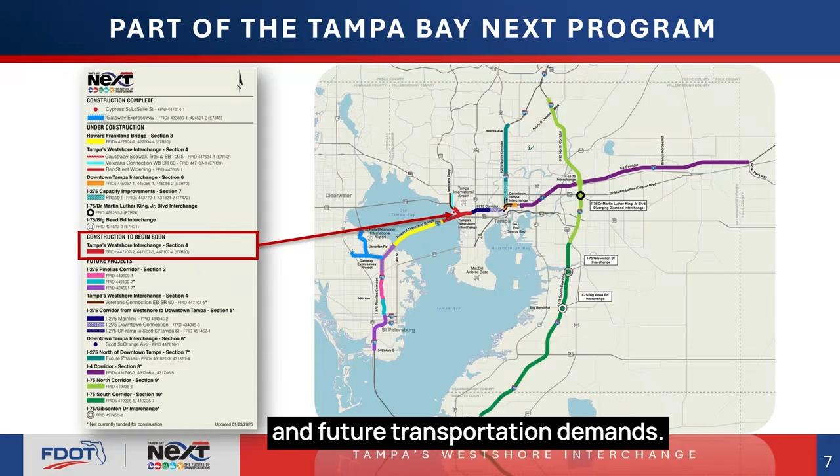Slide 7. Tampa Bay Next, or TB Next, is FDOT's long-term transportation program designed to modernize the region's interstate system. It focuses on improving safety, travel time through the corridor, and connectivity across the Tampa Bay area by addressing critical infrastructure needs on I-275, I-4, I-75, and I-175/375. The program is organized into major initiatives such as interchange reconstructions, express lanes, transit integration, stormwater upgrades, and pedestrian/bicycle facilities. Rather than treating each project in isolation, TB Next provides a coordinated framework so that improvements work together to meet the area's current and future transportation demands. The TWI project we are discussing today is part of the TB Next program.

Slide 8. In January, construction officially began on the Tampa Westshore Interchange project, Florida's first-ever phased design-build transportation project. Phase 1 establishes the foundation for long-term improvements along one of the region's busiest corridors. This phase includes widening and modernizing Interstate 275 and State Road 60, adding new express lanes and flyover connections, and improving access to Tampa International Airport.

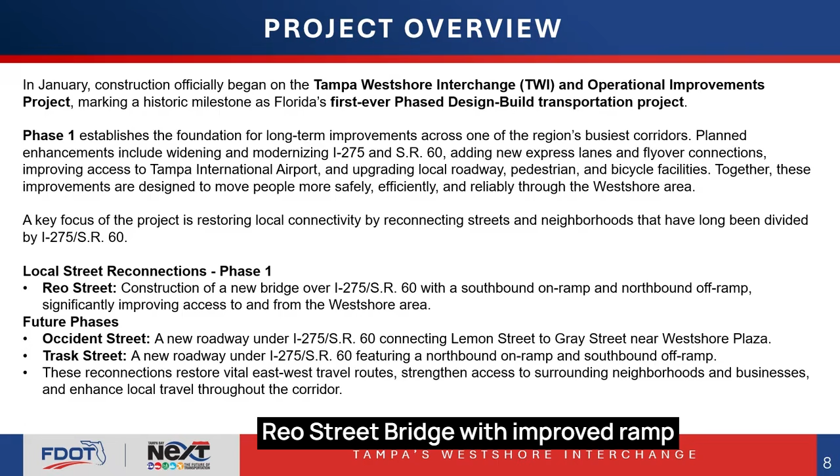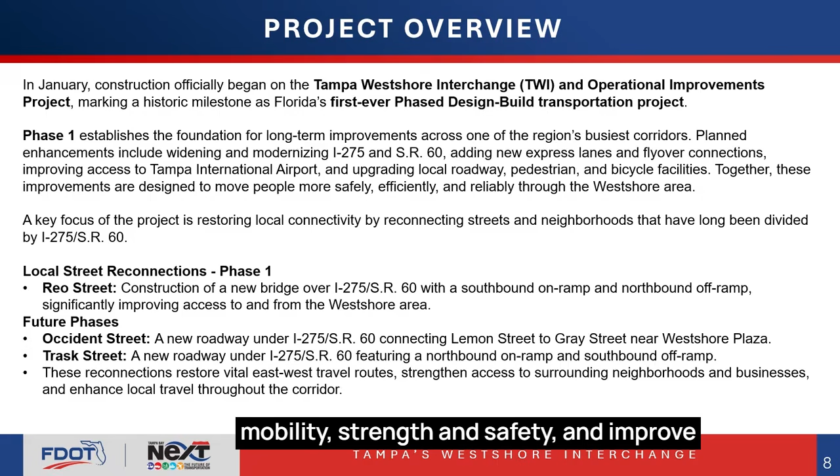The project also enhances local roadways, as well as pedestrian and bicycle facilities, creating a safer and more complete transportation network. A major focus of the project is restoring local connectivity by reconnecting streets that have long been divided by Interstate 275 and State Road 60. This includes construction of a new Reo Street Bridge with improved ramp access as part of Phase 1, along with future connections planned at Occident Street and Trask Street. Together, these improvements will enhance mobility, strengthen safety, and improve access for surrounding neighborhoods and businesses throughout the Westshore area.

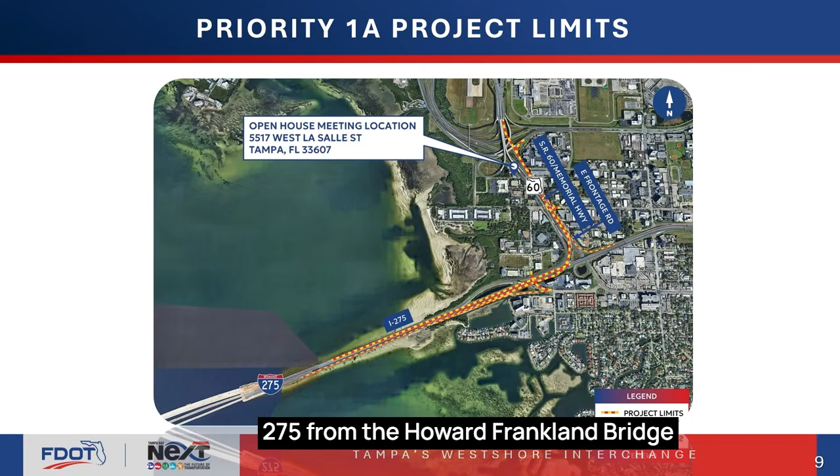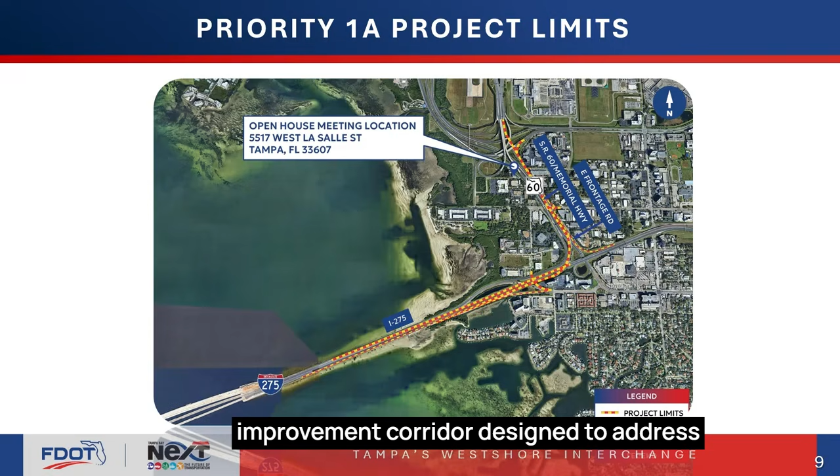Slide 9. The project limits extend along Interstate 275 from the Howard Frankland Bridge eastward to just beyond Lois Avenue, from south of Tampa International Airport north to Kennedy Boulevard. Enhancements are planned along Cypress Street, Kennedy Boulevard, and Reo Street, with several targeted work zones throughout the project area. Together, these limits define a comprehensive improvement corridor designed to address regional travel while enhancing local connectivity within the Westshore District.

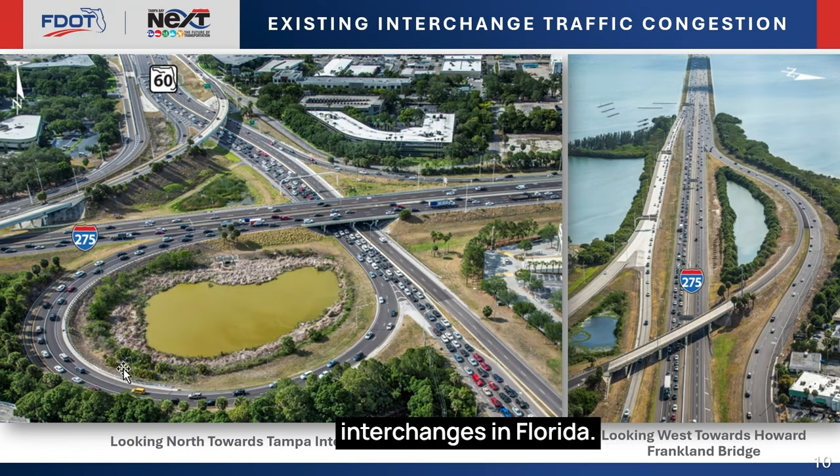Slide 10. Before we look at the proposed improvements, it's important to understand the current configuration of the Westshore Interchange. This area is one of the busiest interchanges in Florida. Every single day, more than 400,000 vehicles move between Interstate 275, State Road 60, the Veterans Expressway, and Tampa International Airport. Commuters, freight trucks, and airport traffic all converge in this interchange.

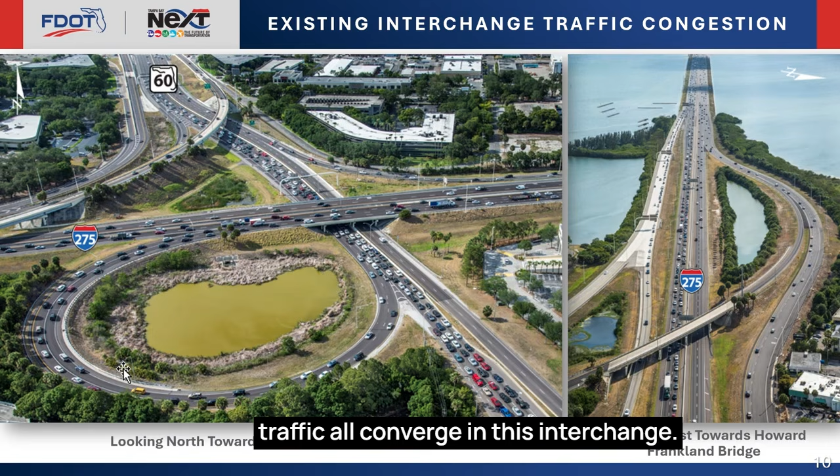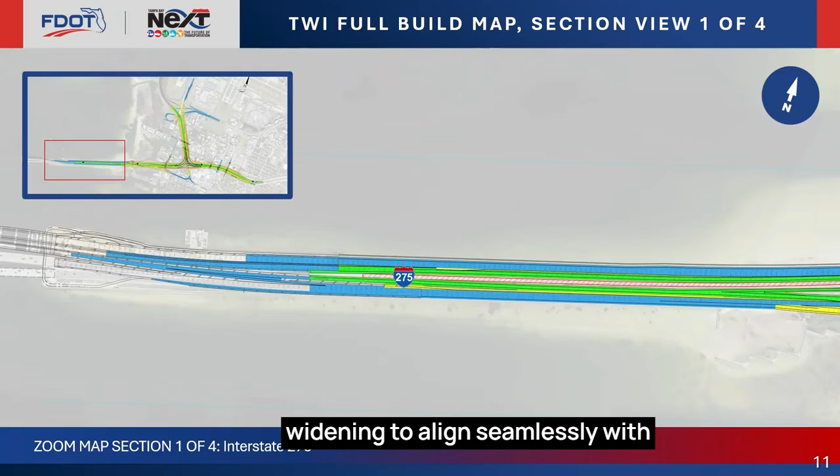Slide 11. Let's look at the future full build out of the TWI project. This section is the westernmost portion of the TWI project, where I-275 connects to the newly reconstructed Howard Frankland Bridge. As part of the project, this segment will see major improvements to I-275, including reconstruction and widening to align seamlessly with the new Howard Frankland Bridge, new lanes and ramp connections designed to improve capacity and reduce congestion approaching the bridge, upgraded shoulders and safety features, preparing the corridor for future express lanes.

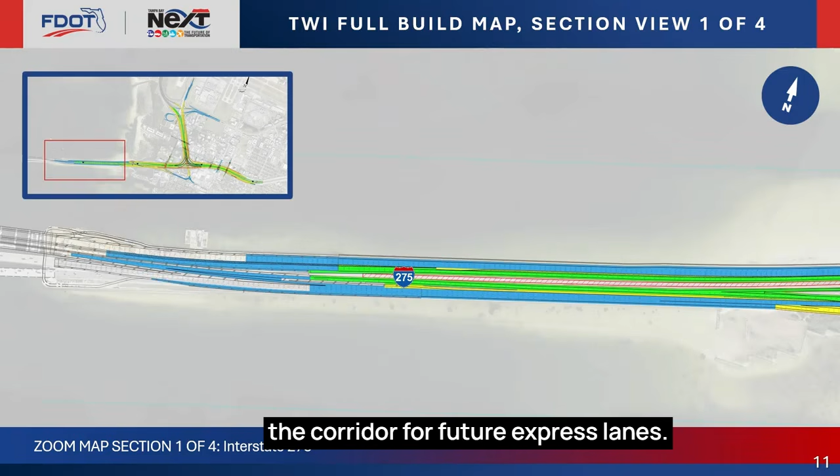These upgrades ensure that traffic flows smoothly and safely between the Howard Frankland Bridge and the Westshore Interchange, creating a stronger, more reliable regional connection across Tampa Bay.

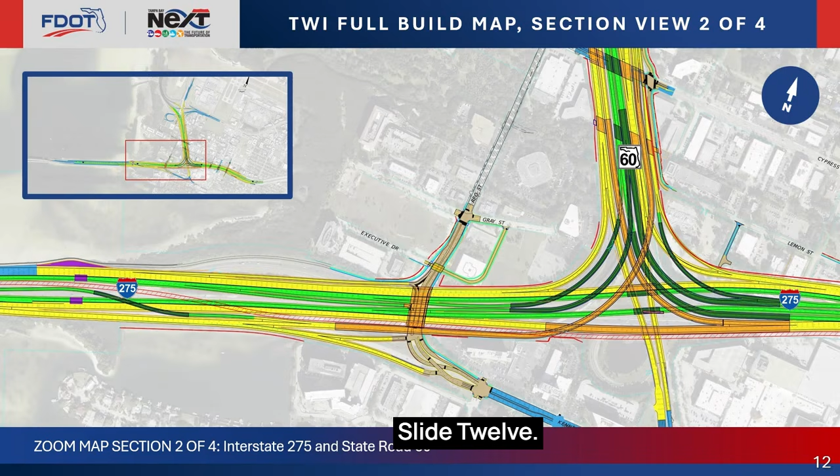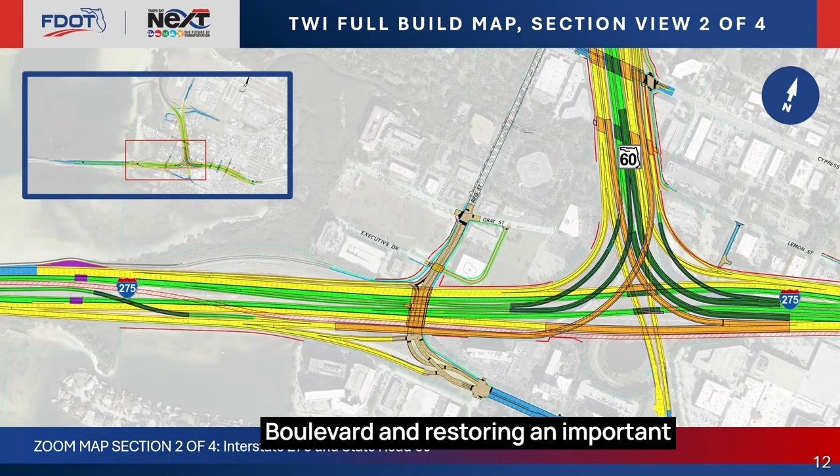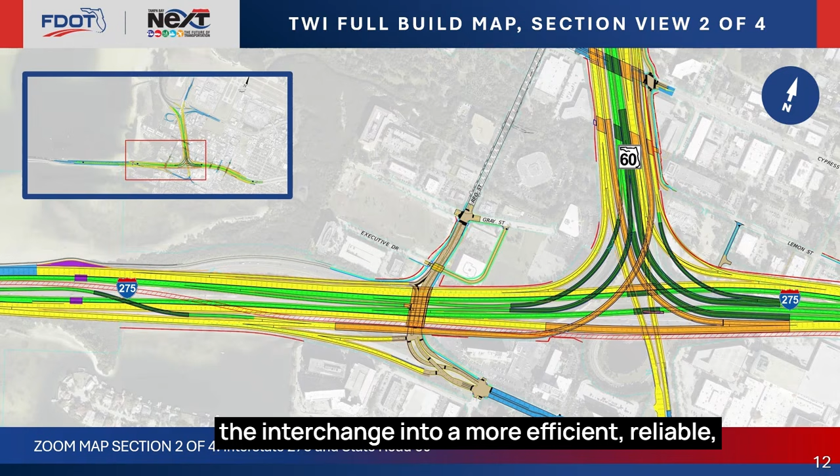Slide 12. The ultimate design reconfigures the I-275 and SR-60 interchange to improve traffic flow, capacity, and safety. A new Reo Street Bridge will cross over I-275, reconnecting to Kennedy Boulevard and restoring an important east-west route for local traffic. New flyover ramps will provide more direct connections between I-275, SR-60, and Tampa International Airport, reducing lane changes and weaving. Upgraded drainage, lighting, and landscaping will further enhance safety and the overall appearance of the corridor. Together, these improvements will transform the interchange into a more efficient, reliable, and safer transportation hub for the region.

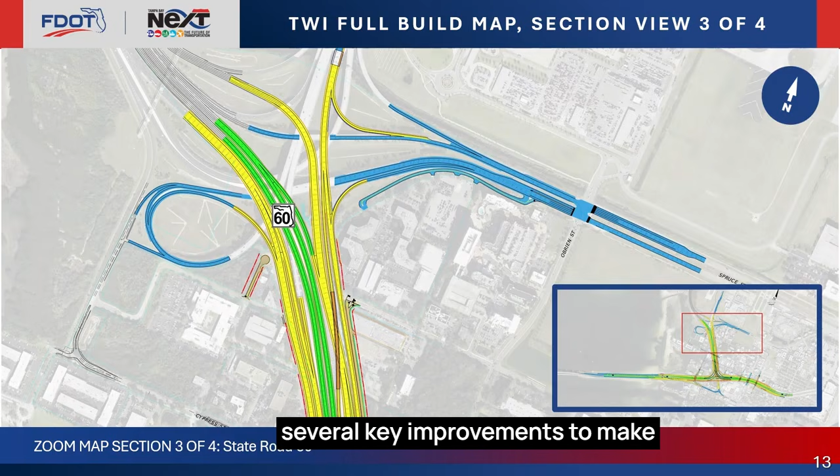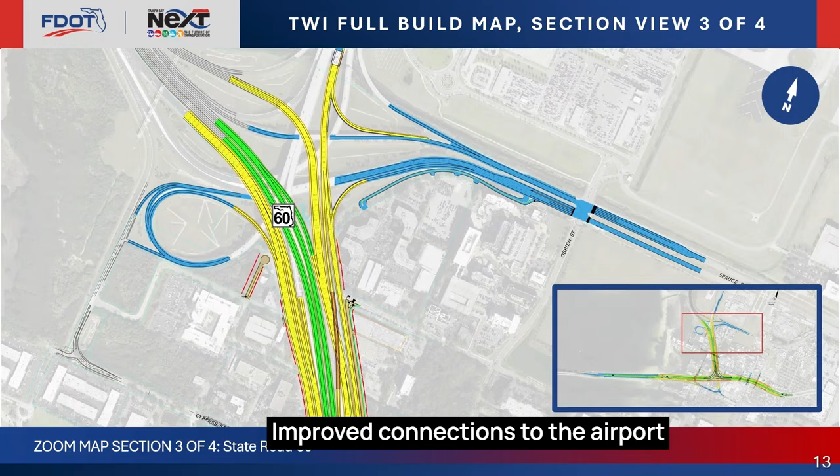Slide 13. This area here is where SR-60 connects directly into Tampa International Airport. The future configuration introduces several key improvements to make this section operate more efficiently. New, longer ramps and auxiliary lanes will help separate airport traffic from through traffic on SR-60, reducing congestion and weaving. Improved connections to the airport entrance roads will also make it easier and safer for travelers to reach the terminals.

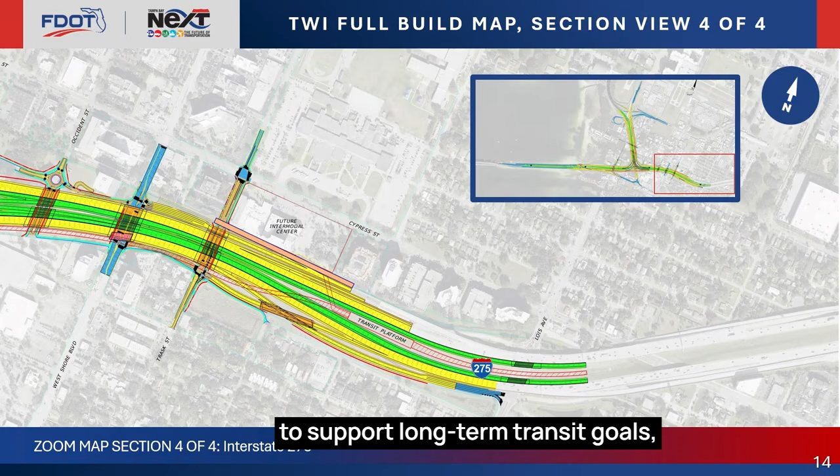Slide 14. This final section highlights I-275 near Cypress Street, a critical link between the Westshore Business District and the greater Tampa Bay region. The ultimate configuration includes new connections at Occident and Trask Streets to reconnect surrounding neighborhoods, space for a future intermodal center to support long-term transit goals, and enhanced pedestrian and bicycle links to the shared-use path network. Together, these improvements will help transform I-275 into a safer, more connected corridor that supports local travel and future regional growth.

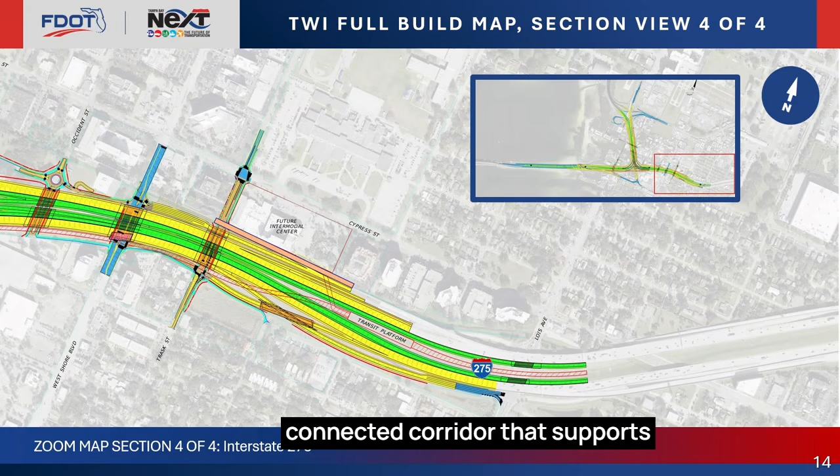Slide 15. Here we're looking at the section where SR 60 meets I-275, a critical gateway for drivers heading to and from the airport, downtown Tampa, and the Veterans Expressway. Today's interchange is a central pinch point. The ramps are short and closely spaced, and drivers from SR 60 often must weave across multiple lanes to reach I-275 north or south.

That constant lane changing creates slowdowns, backups, and a potential for crashes.

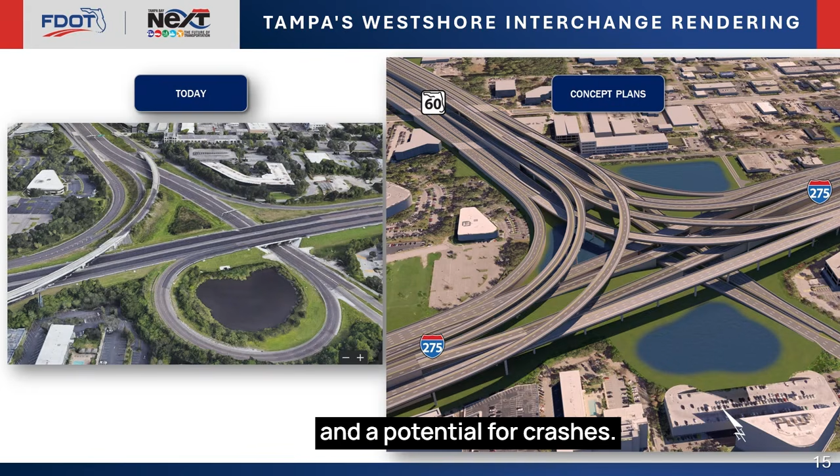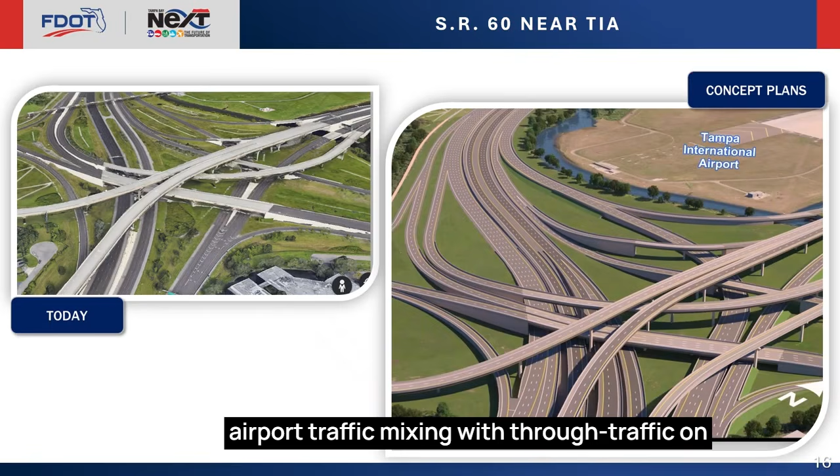Slide 16. This segment focuses on SR 60 near Tampa International Airport, one of the most heavily traveled corridors in the Westshore area. Today, this stretch is often clogged with airport traffic mixing with through traffic on SR 60, especially during peak flight times. The short merges and lack of dedicated lanes cause backups that spill onto the main line and create delays for airport travelers, as well as commuters heading to the Veterans Expressway or I-275.

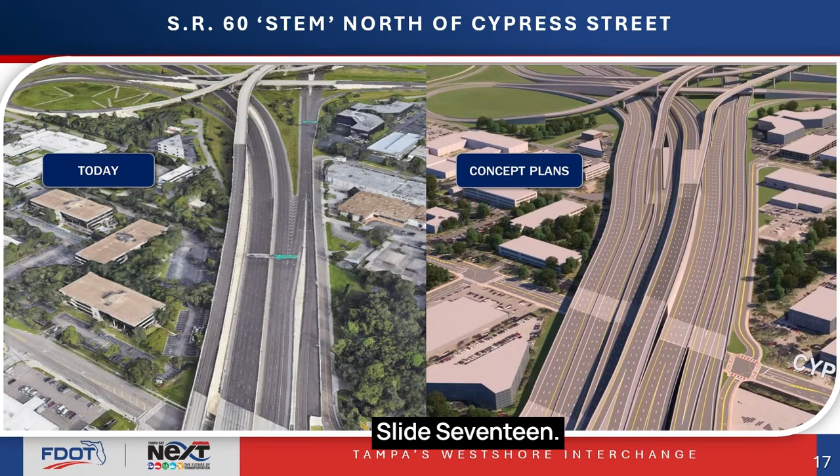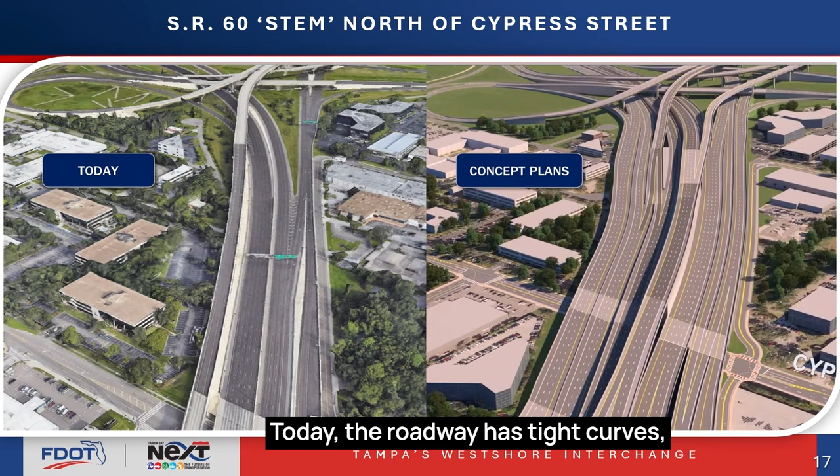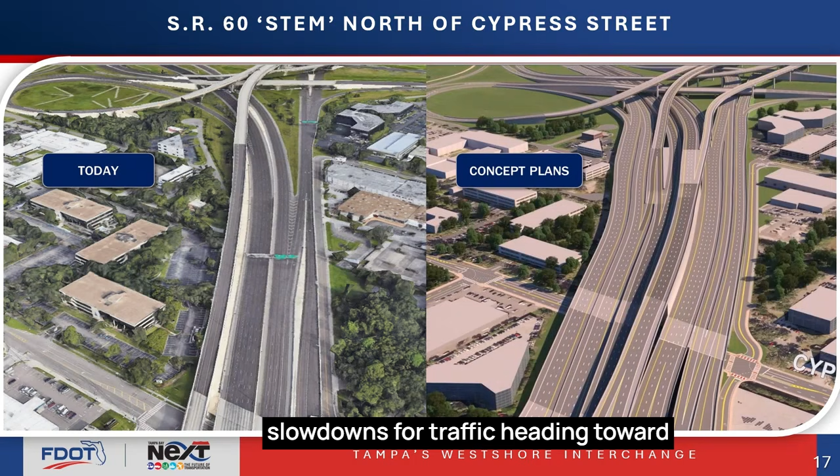Slide 17. The SR 60 stem, just north of Cypress Street, currently creates challenges for drivers traveling between the Veterans Expressway, I-275, and Westshore. Today, the roadway has tight curves, short merge areas, and limited lane capacity, which forces drivers to slow down and weave to reach their exits. This section is often a bottleneck during peak hours and a source of frequent slowdowns for traffic heading toward the interchange or local businesses.

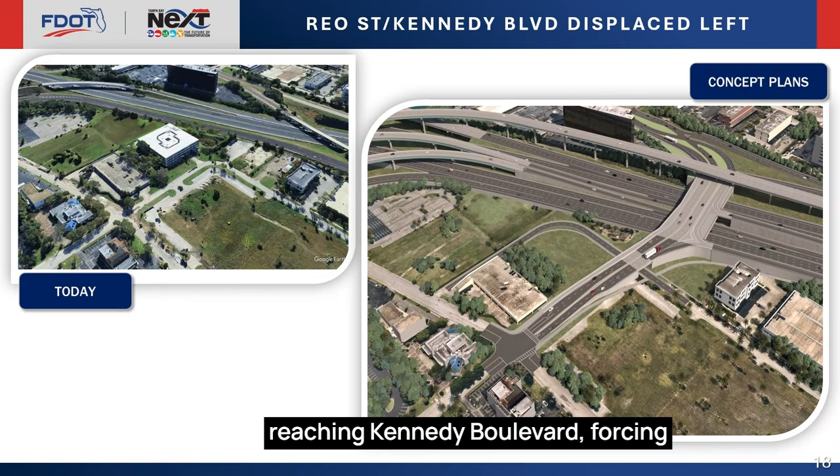Slide 18. Reo Street is an important local connection in the Westshore area. Today, Reo Street ends before reaching Kennedy Boulevard, forcing drivers to use other nearby streets. This often creates extra turns, added travel time, and more congestion on already busy local roads.

Slide 19. Because of the size and complexity of the TWI project, the department is using a phased design-build delivery method. The full build will be constructed in phases as funding becomes available, beginning with Priority 1A. This approach allows construction to move forward in sections, while design continues in others, improving efficiency and providing flexibility as conditions evolve. Each phase is carefully sequenced to maintain traffic flow, keeping as many lanes open as possible, shifting traffic to new facilities as they're completed, and using temporary detours only when necessary.

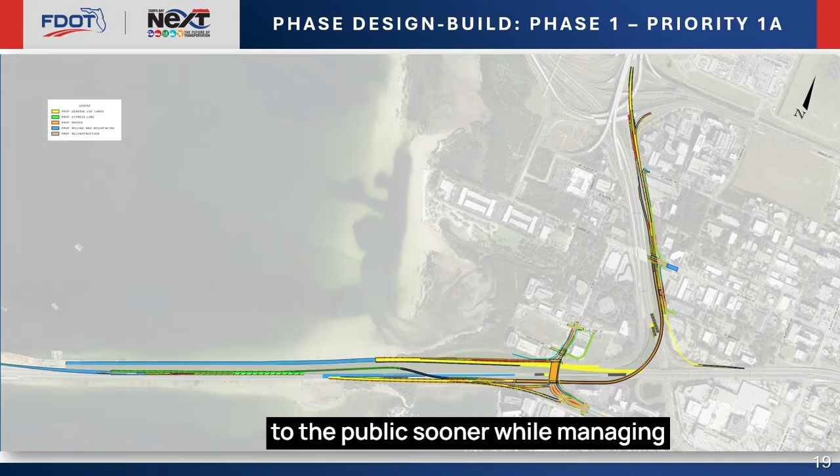Overall, phased design-build helps reduce construction time and deliver improvements to the public sooner, while managing a project of this scale responsibly. Slide 20. This section is the westernmost portion of Priority 1A, where the TWI project connects directly to the newly reconstructed Howard Frankland Bridge.

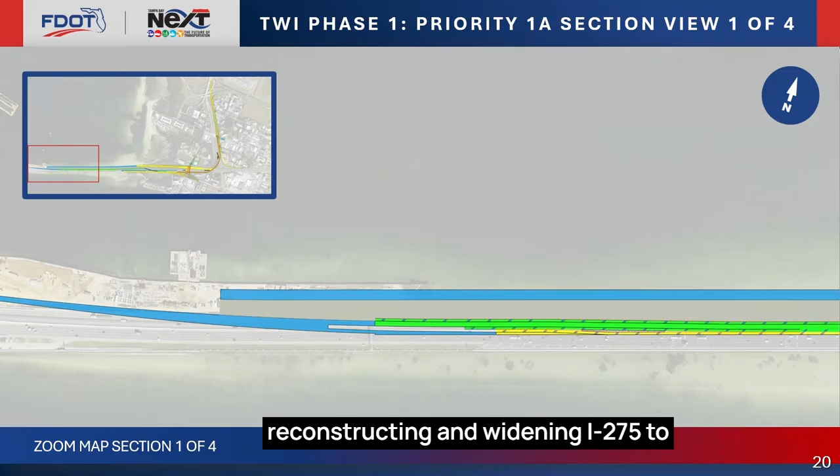Improvements here ensure a smooth transition between the two projects as work progresses east toward the main interchange. Under Priority 1A, this segment includes reconstructing and widening I-275 to match the new bridge alignment, upgrading pavement, shoulders, and drainage, and completing key foundation and approach work for the remainder of the corridor. Because it links two major regional projects, this area plays an important role in maintaining continuity for drivers traveling between Pinellas and Hillsborough counties.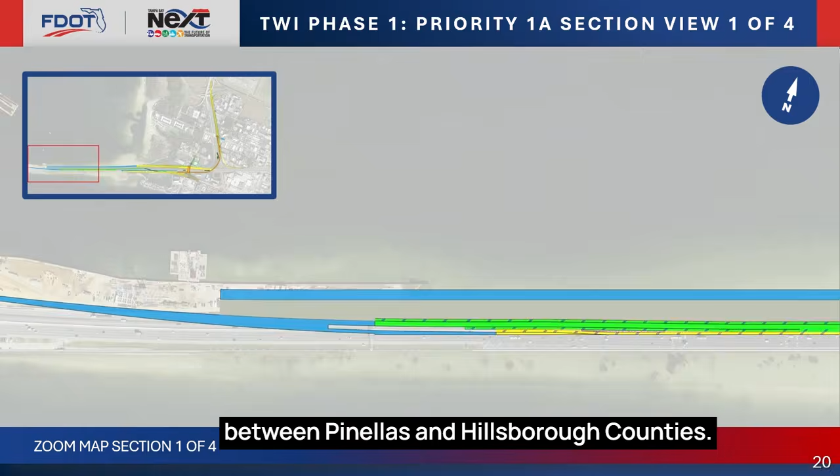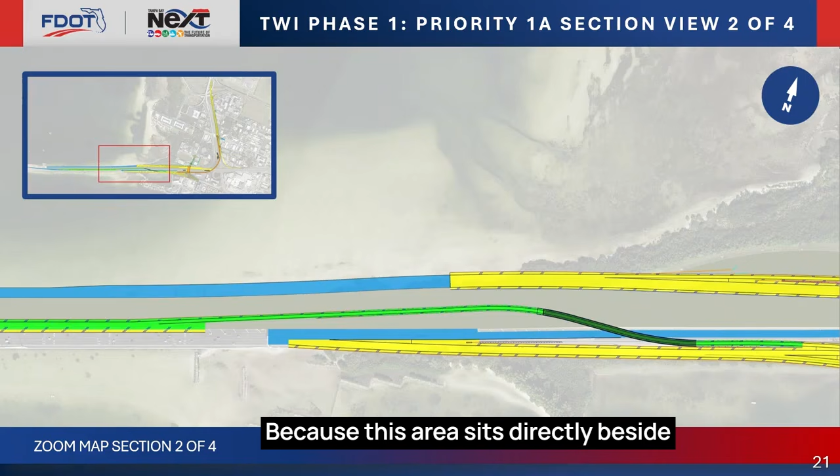Slide 21. This section represents the second portion of Priority 1A, extending east from the Howard Franklin Bridge toward the Westshore Interchange. Improvements include new lanes and shoulders that continue the widened I-275 cross-section, transition work to create a smooth connection for northbound and southbound traffic, ramp and foundation preparations for future eastern connections, and upgraded stormwater and shoreline protection measures along the bayfront. Because this area sits directly beside the bay, construction requires careful coordination with environmental safeguards.

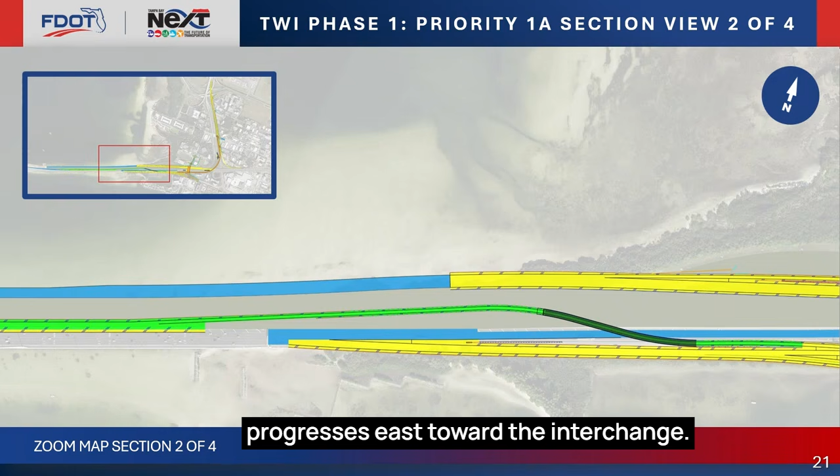Overall, this segment builds on the Howard Franklin Bridge project while keeping I-275 safe and operational as work progresses east toward the interchange. Slide 22. This image highlights the eastern portion of Priority 1A, focused around Reo Street, West Gray Street, and Cypress Street.

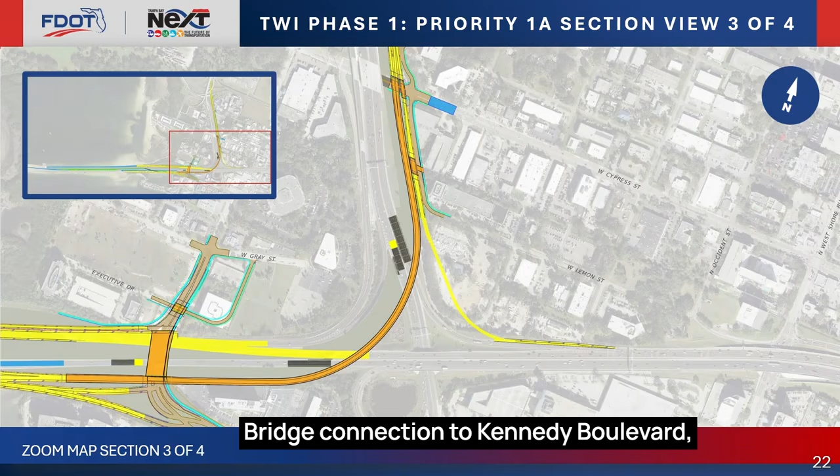Improvements here include reconstructing ramps and bridges connecting I-275 to the local street network, new ramp alignments near West Gray Street and Executive Drive to improve access and safety, early preparation for the future Reo Street Bridge connection to Kennedy Boulevard, and upgrades to drainage and utilities to support the expanded interstate. Because this area is highly developed, construction will be carefully coordinated with nearby businesses and roadways to help minimize disruptions.

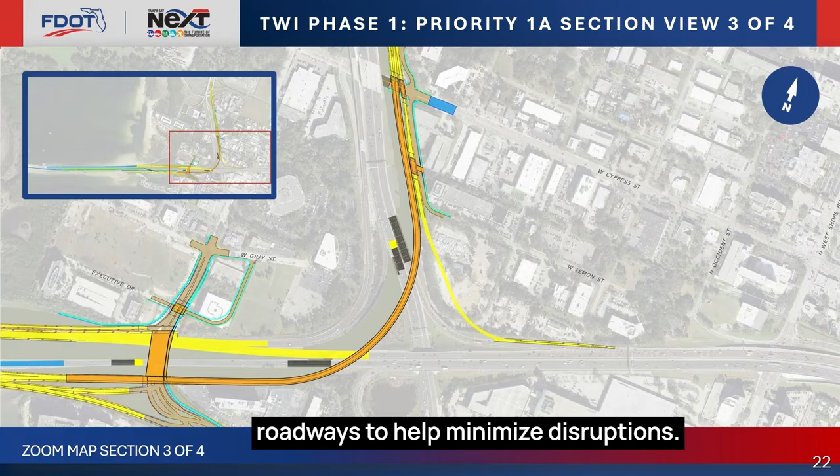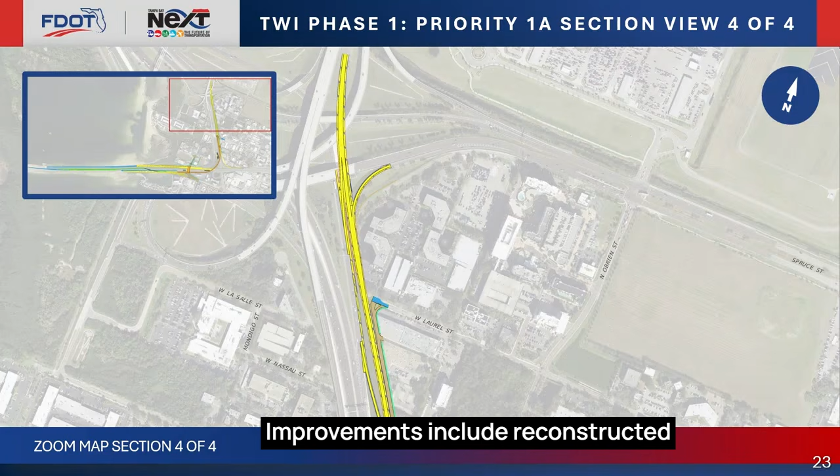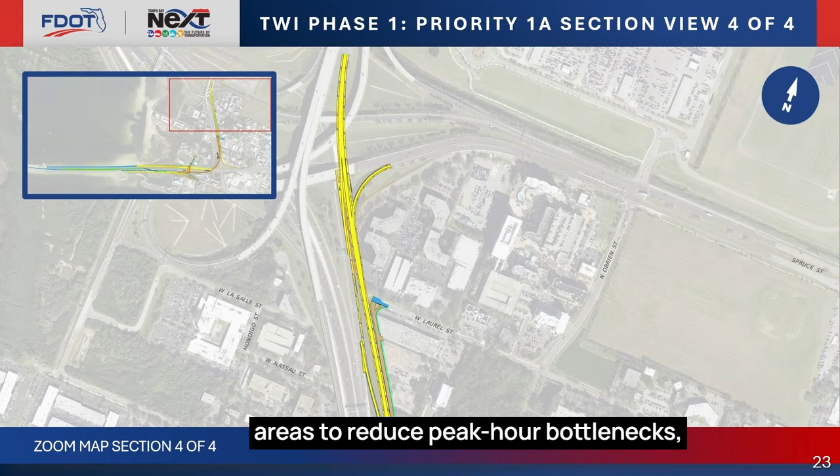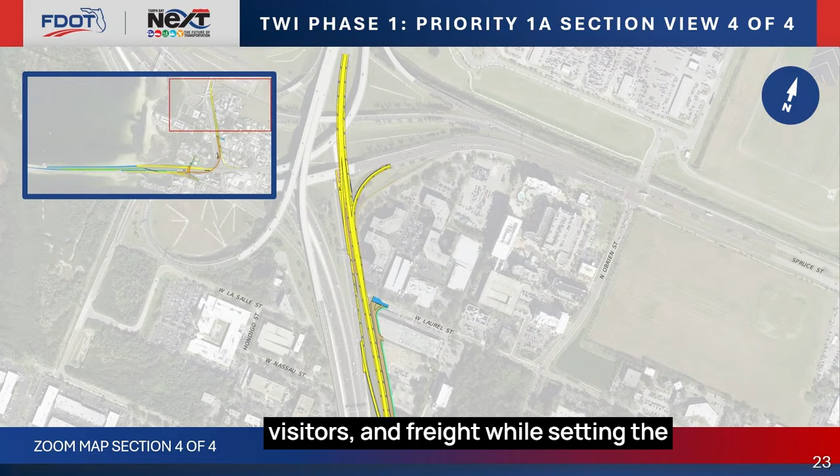Slide 23. This final segment highlights the northern portion of Priority 1A along SR 60 near Tampa International Airport, one of the busiest areas of the corridor. Improvements include reconstructed ramps and new lane configurations to provide more direct access to the airport and SR 60, enhanced merge and exit areas to reduce peak hour bottlenecks, and upgraded drainage and roadway infrastructure for long-term durability. As a key connector between I-275 and the airport, this segment will improve safety and traffic flow for residents, visitors, and freight while setting the stage for future interchange upgrades.

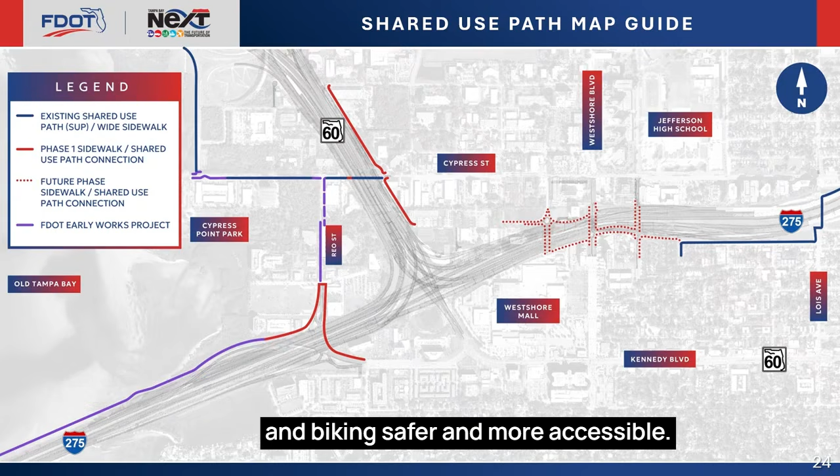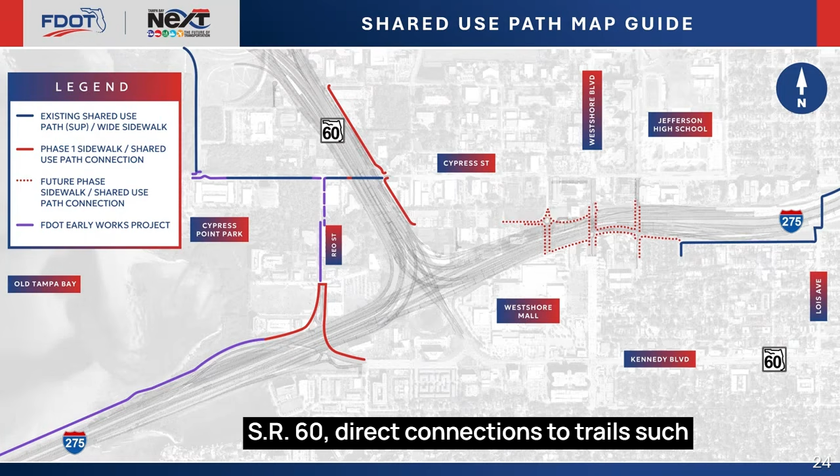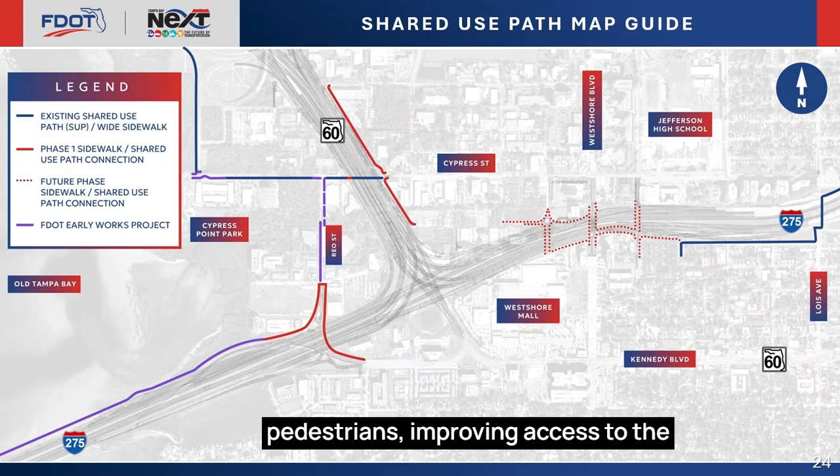Today, routes around the interchange are limited and disconnected. The future concept adds a continuous shared-use path along portions of I-275 and SR 60, direct connections to trails such as the Courtney Campbell Trail and nearby neighborhood sidewalks, and safer crossings with improved lighting at key locations. These enhancements will create a more seamless network for cyclists and pedestrians, improving access to the airport, local businesses, and regional trails.

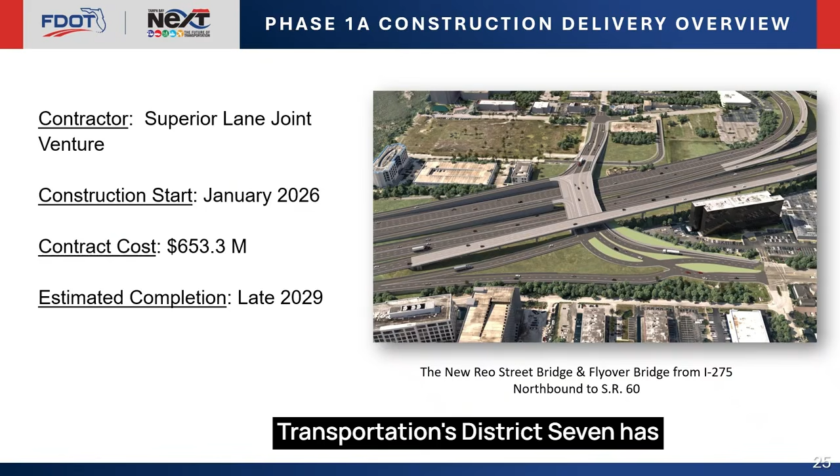In Priority 1A, the project will connect the Howard Frankland Trail to the SR 60 Trail. The Florida Department of Transportation's District 7 has selected Superior Lane Joint Venture to construct the Priority 1A phase. Construction started in January and is expected to be completed late 2029.

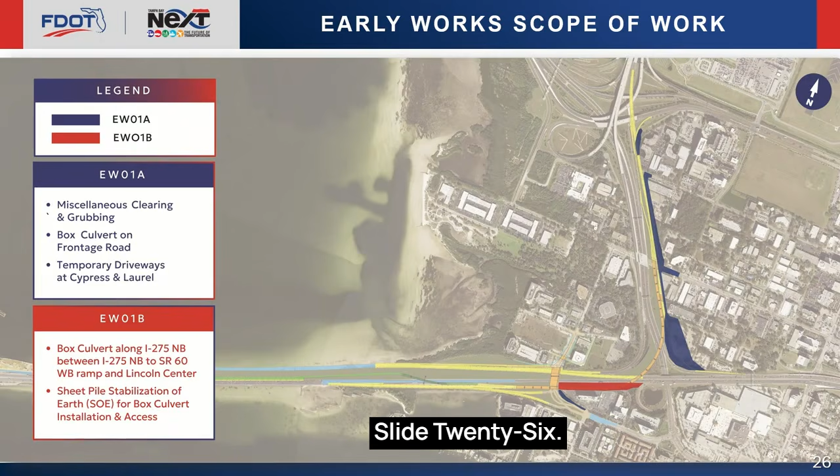The work in this phase is divided into early works and major works. Early works includes the construction of 2 box culverts, which will improve drainage along I-275 and SR 60 ITS reconfiguration, as well as relocation of City of Tampa water, wastewater, and reclaimed water lines in the way of the major work packages.

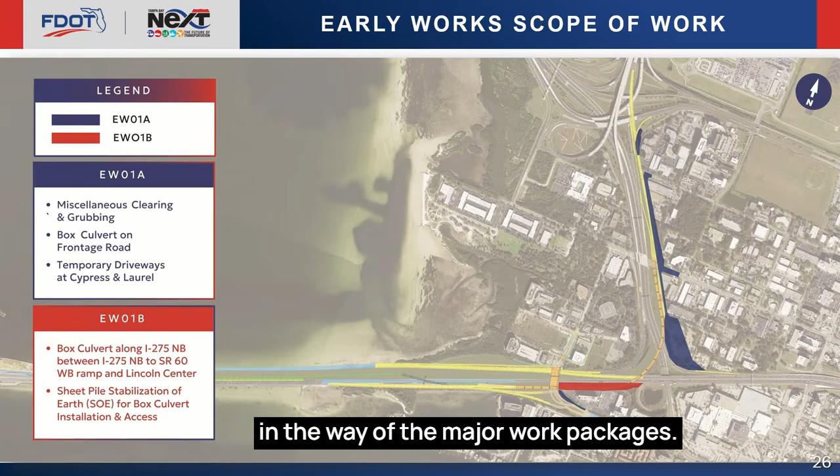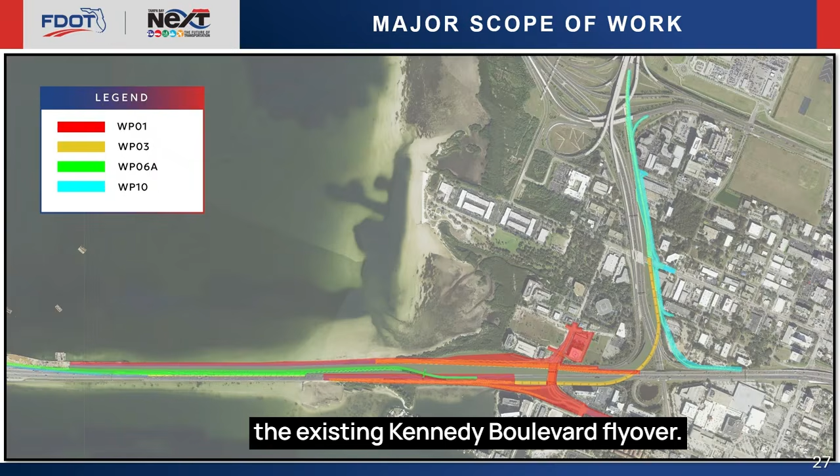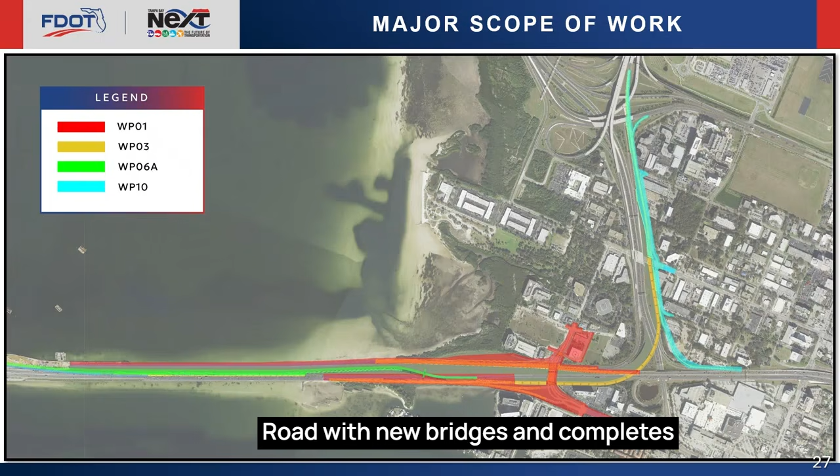Phase 1A major works include construction of a new Reo Street Interchange with new bridges, ramps, and roadway reconstruction, along with removal of the existing Kennedy Boulevard flyover. The project also builds a new flyover from northbound I-275 to SR 60, adds northbound I-275 express lanes, constructs westbound SR 60 and the East Frontage Road with new bridges, and completes final ITS, friction course, and pavement markings throughout the project limits.

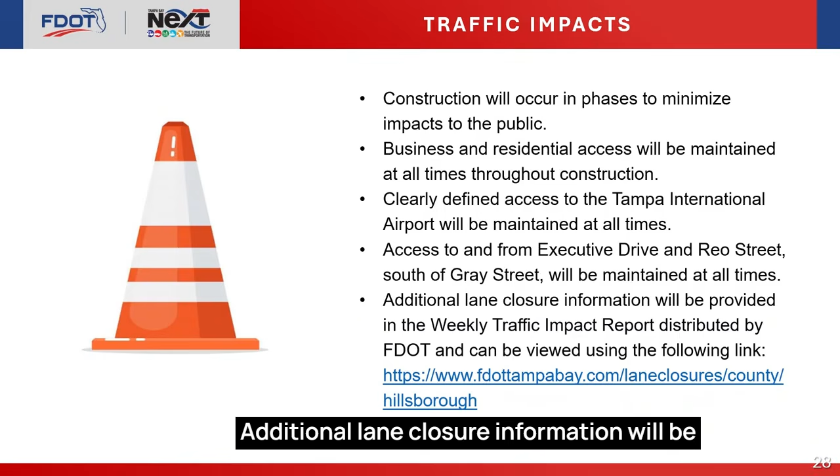Traffic impacts: construction will occur in phases to minimize impacts to the public. Business and residential access will be maintained at all times throughout construction. Clearly defined access to the Tampa International Airport will be maintained at all times. Access to and from Executive Drive and Reo Street, south of Gray Street, shall be maintained at all times. Additional lane closure information will be provided in the weekly traffic impact report distributed by FDOT and can be viewed by visiting the FDOT Tampa Bay website.

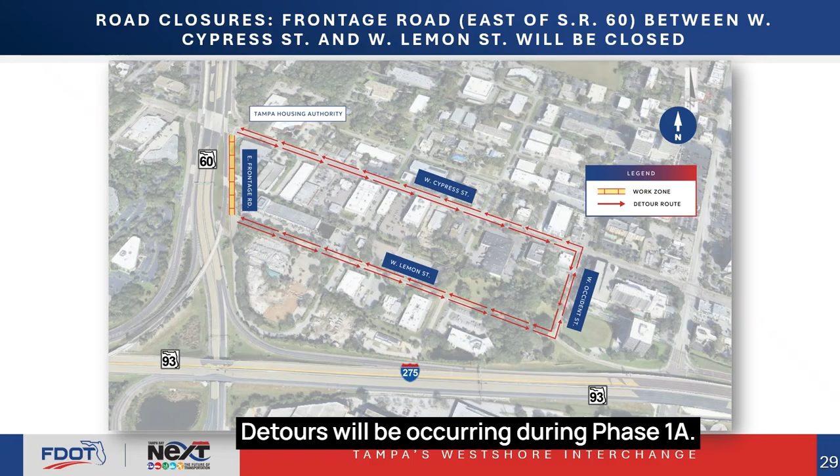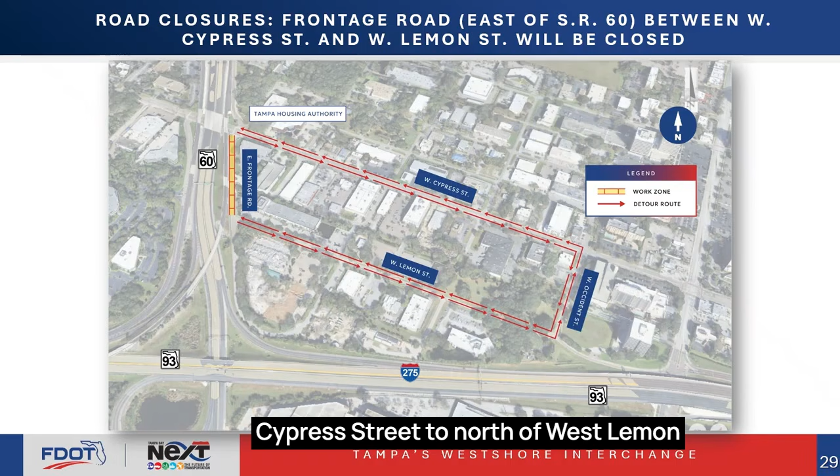Detours will be occurring during Phase 1A. These detours are as follows: Frontage Road, east of SR 60, detour map, East Frontage Road, located east of SR 60/Memorial Highway. From south of West Cypress Street to north of West Lemon Street will be closed until January 2027.

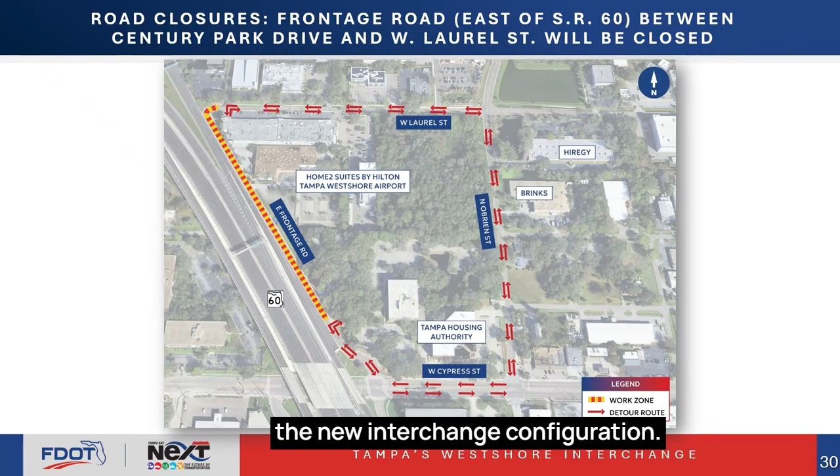During Phase 1A, a permanent closure will take place along the East Frontage Road, located east of State Road 60 or Memorial Highway. The segment between Century Park Drive and West Laurel Street will permanently close to accommodate the new interchange configuration. Motorists should follow posted detour signage and use alternate routes to reach their destinations.

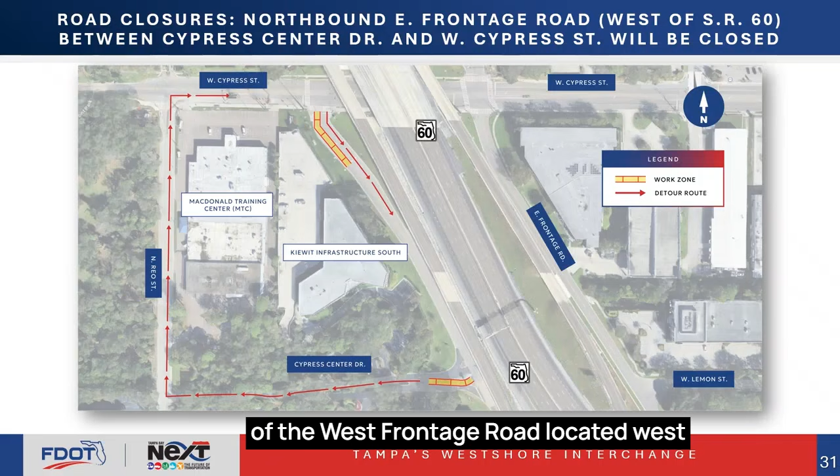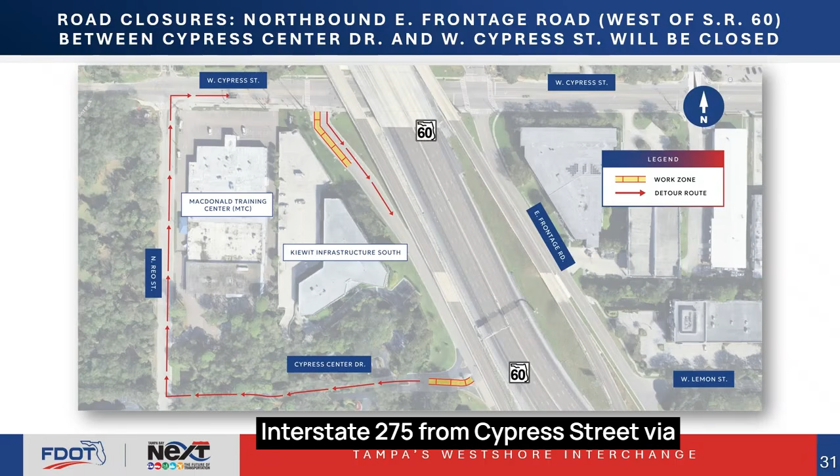During Phase 1A, the northbound lane of the West Frontage Road, located west of State Road 60 or Memorial Highway, will permanently close between Cypress Center Drive and West Cypress Street. Under the new traffic configuration, motorists will continue to have access to southbound Interstate 275 from Cypress Street via the one-way southbound frontage road.

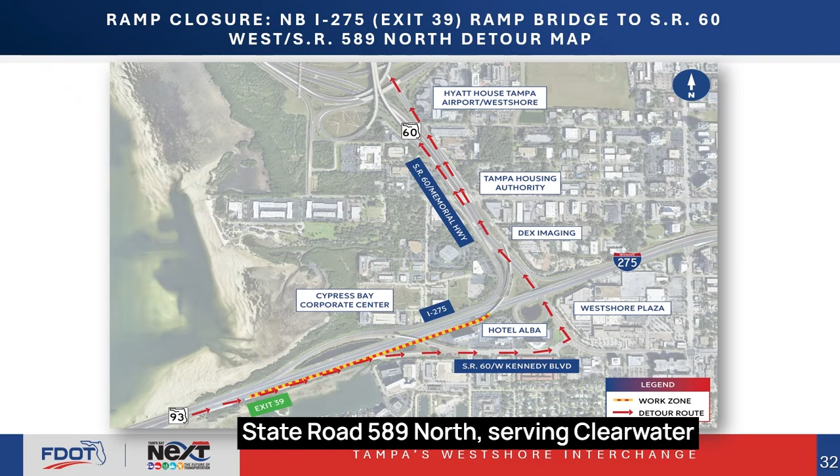The left northbound Interstate 275 exit 39 ramp bridge to State Road 60 west and State Road 589 north, serving Clearwater and Tampa International Airport, will close nightly from 10 p.m. to 5 a.m. Closures are scheduled Monday, March 2nd through Friday, March 6th, and Sunday, March 8th through Friday, March 13th. Motorists should follow posted detour signage and allow additional travel time.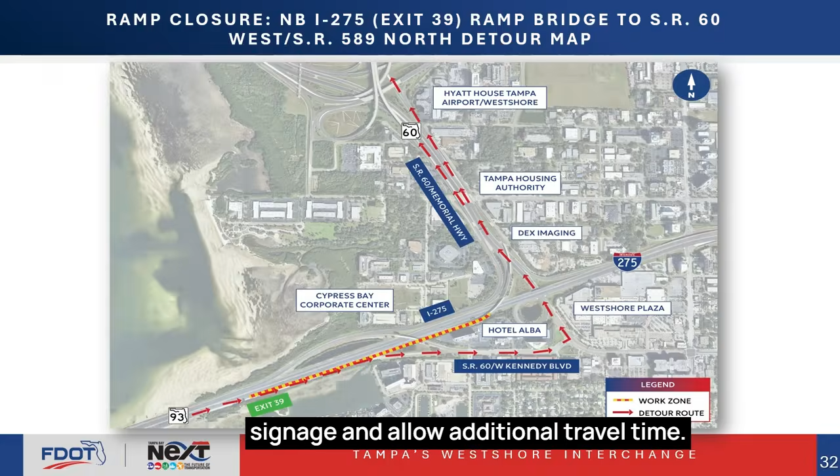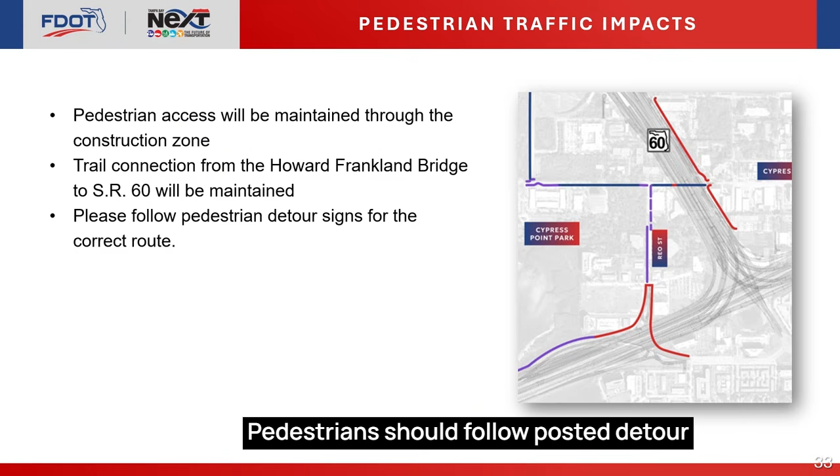Pedestrian access will be maintained throughout the construction zone. The trail connection from the Howard Frankland Bridge to State Road 60 will remain open. Pedestrians should follow posted detour signage to navigate the area safely.